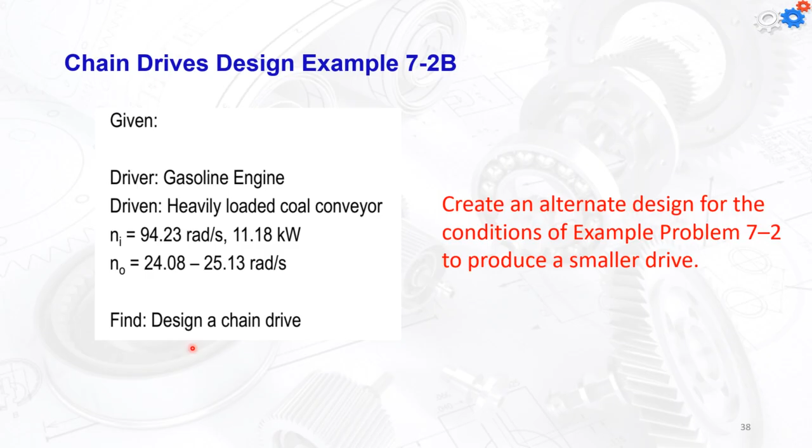Okay, so in example two, we're going to actually redesign the same chain system, but we're going to have a smaller drive. Okay, so it's exactly the same RPM, the same power, but we're going to use more than one strand. So we're going to do that simply by applying what we learned from the slide earlier. We're going to use a multi-strand design to permit the smaller pitch chain to be used to transmit the same design power of 21 horsepower and the same speed of 900 RPM.

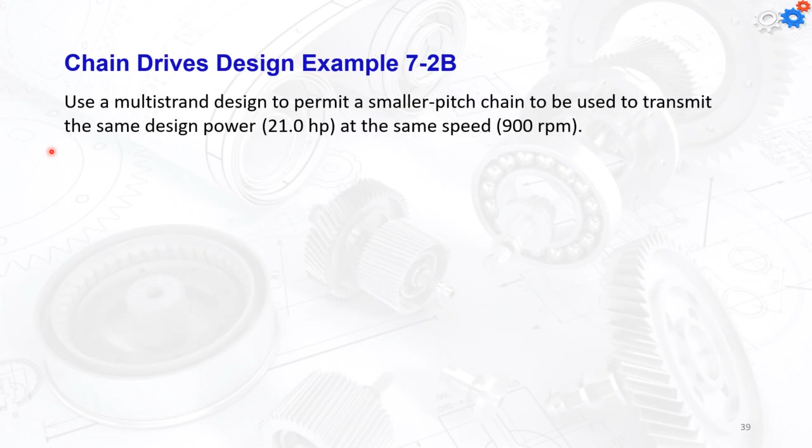So you remember from the above slide and also from the book, if you go to page 281 in chapter 7 of the textbook, you'll find that the ratings are for the single strand of the chain. Although multiple strands do increase the power capacity, they do not provide a direct multiple of the single strand capacity. So once again, the single strand is not half of the double, it's not one third of the triple, and it's not 1/4 of the quadruple. So we're going to have the strand factors to be 1.7, 2.5, and 3.3.

So in this scenario, we're going to choose four strands. So that means that our power here, 21 horsepower, is going to be divided by 3.3. So each strand out of the four is going to have power equal to 21 divided by 3.3, which is going to make it 6.36. Now, if I go back to the chain type number 60, you will find that these chains don't have the low range of power of 6.36 with the 900 RPM.

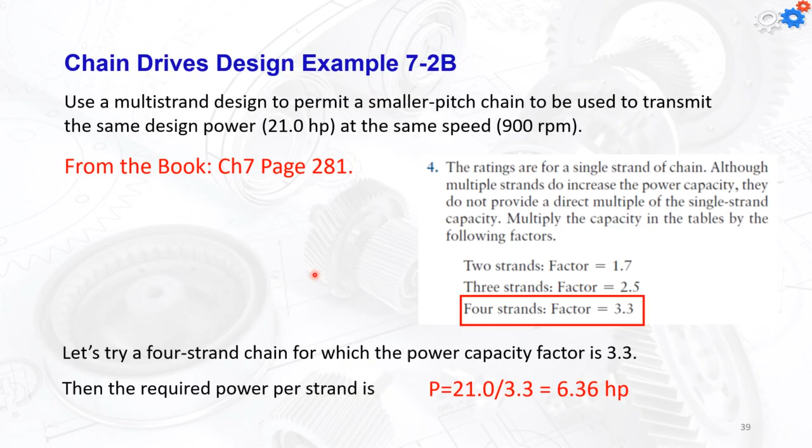So let's try a smaller chain. In that case, we're going to go to the type 40, table 7-14. The number 40 chain has a half inch pitch value and will be satisfactory. And we did that simply by finding the 900 here, the 6.57 horsepower, and this will tell me that the number of teeth is going to be between 16 or 17. We're going to choose 17, because the horsepower we have is 6.36, so the 6.18 cannot take it, but the 6.57 will take it. So we're going to choose 17 teeth for the smaller sprocket.

We said earlier, okay, whether we choose 17 or 18, it wasn't that different to get the diameter. Now you will see that it's going to be different, mainly because the pitch value has been dropped down by 30%. It was 0.75, now it's 0.5 inches. So if you would like to check it on your ruler, it's from 19 millimeters dropped down to 13 millimeters. So this will make a big difference depending on the length we are going to have.

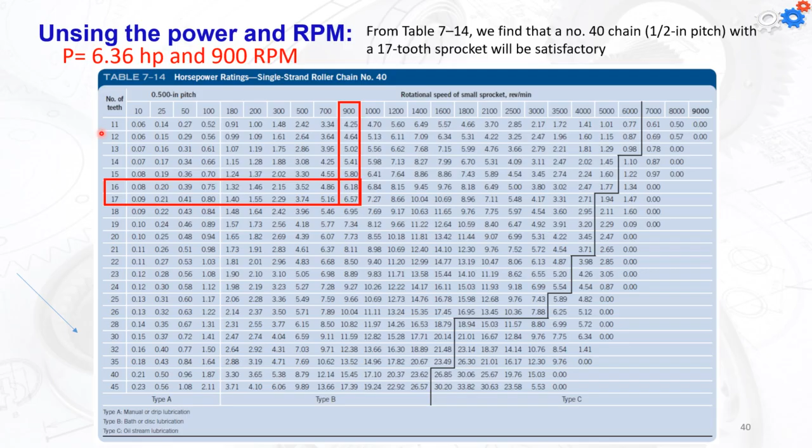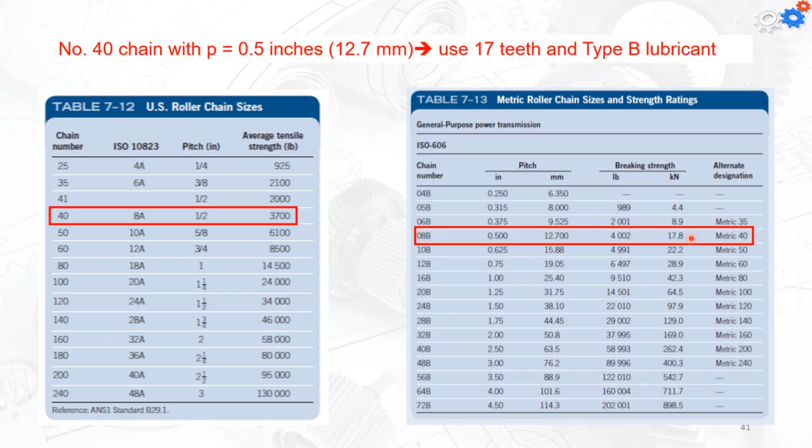Okay, so 17 is going to be used, and once again, we go back to the tables here. The 40 is going to have half inch pitch, 3,700 pounds for the strength, and for the metric case, we have the 08B, which is going to have 12.7 and 17.8 kilonewtons for the breaking strength. So number 40 chain is going to be used. We can now calculate the output number of teeth. The velocity ratio, remember, is the same, 3.83. We haven't changed the output RPM. So now we're going to multiply the 17 by 3.83, and the number of teeth is going to be 65.11. We're going to use 65 teeth.

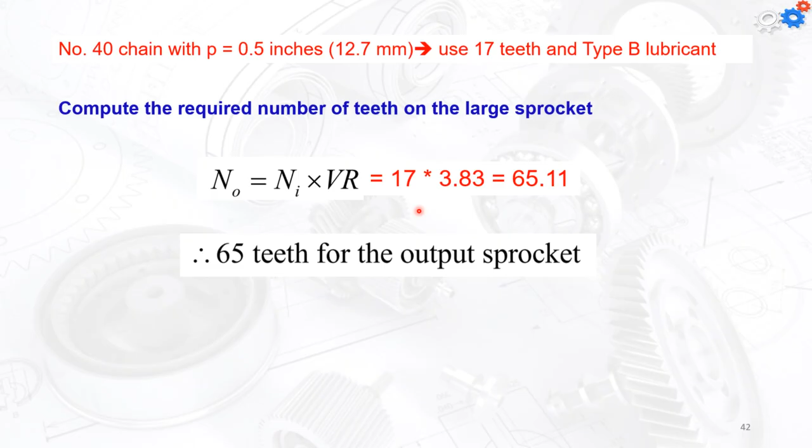Again, we're going to calculate the actual expected output speed. 17 and 65, so 65 divided by 17 is going to be the new VR ratio, and it's going to be 3.8235. So now we would like to check if the output RPM is going to be within the range of 24 something or not. So we just did that: 93.23 radians per second, multiplied by 17 divided by 65. It's going to be 24.38, so it's going to be okay. It's within the range, so we will accept this design.

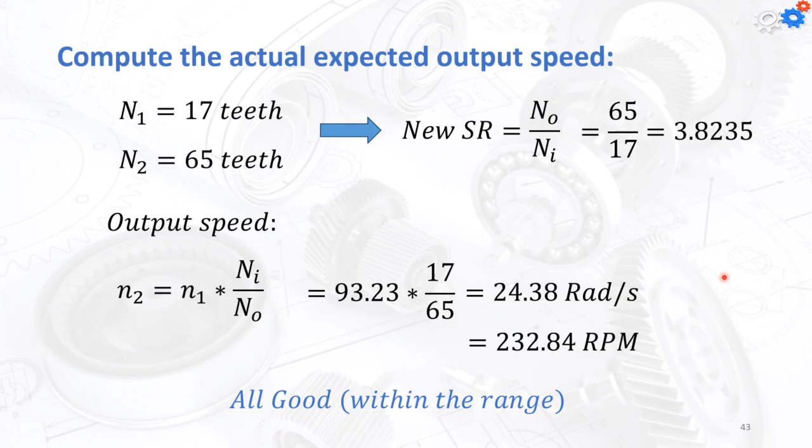Now we know the number of the teeth, and we know the pitch value is 12.7 millimeters, so we can calculate the new diameters. So the diameter 1 is 12.7 divided by the sine of 180 divided by 17. And for the diameter 2 is going to be 12.7 divided by the sine of 180 divided by 65.

Okay, so this will be the equation we're going to apply, and we're going to get that the first one is going to be 69.16. Remember, it was 109. So we almost have something like 45%, okay, within the range. Okay, sorry, 55%. And the same thing is going to be happening here. We're going to have 262. It was 400. So you can see that by changing the pitch value, the diameters will be changed a lot.

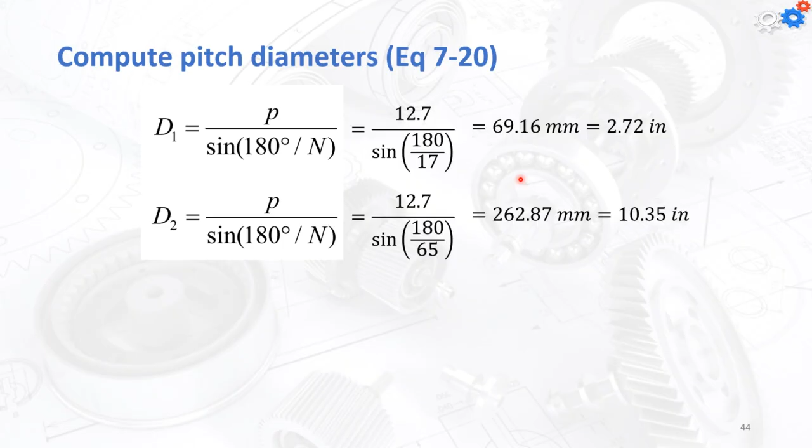So that's how we're going to do it. Just choose a different chain, divide the power by the factor of the strand, and you will get smaller sprockets. Now, we need to find the C value. Again, we're going to get something within the range. Let's choose 30 now. I'm going to use 30 because we can actually check 30, 35, it's up to you. If you're going to put that in an Excel sheet, everything will be done within seconds.

Now, we're going to calculate the L value for the chain by applying the equation 7-18. So the L value is going to be equal to, sorry, where's my equation? It's here. So we're going to get that the value of the pitch is going to be 102.9, which is equal to 51.45. I'm going to choose 103. Again, I'm changing that from the book, they choose 104. I use 103 pitches because I would like to have a shorter chain as well.

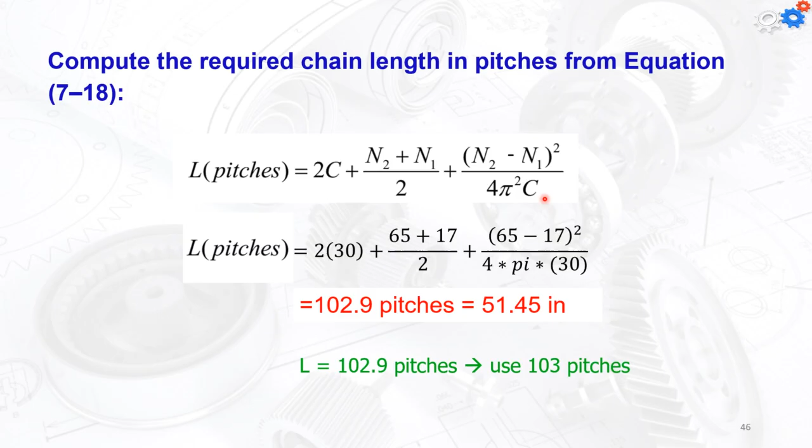So we're looking at the range of 51.5 inches as the length of the chain we're going to have. That's the open chain, of course. Now we're going to use the L value and the N values to calculate the actual C value. And we're going to come out with the value to be 30.028. So it's 30, the one that we're looking for. So the C distance is going to be equal to 15 inches or 381.36 millimeters. We used 30 pitches, and this guess was very good.

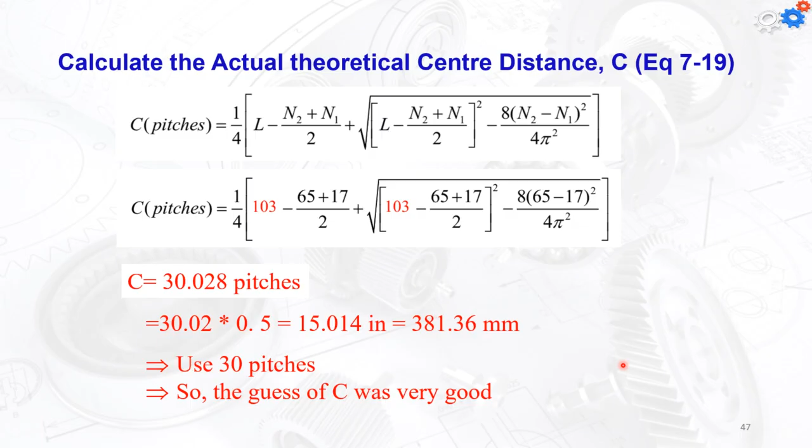Now that's it. We're only going to calculate the thetas with the new diameters, and you see that has been confirmed. The theta 1 should be more than 120. And we'll get 151, which is more than 120, so it should be okay. And continue with the second one, to have 208. Double check that theta 1 plus theta 2 should be equal to 360.

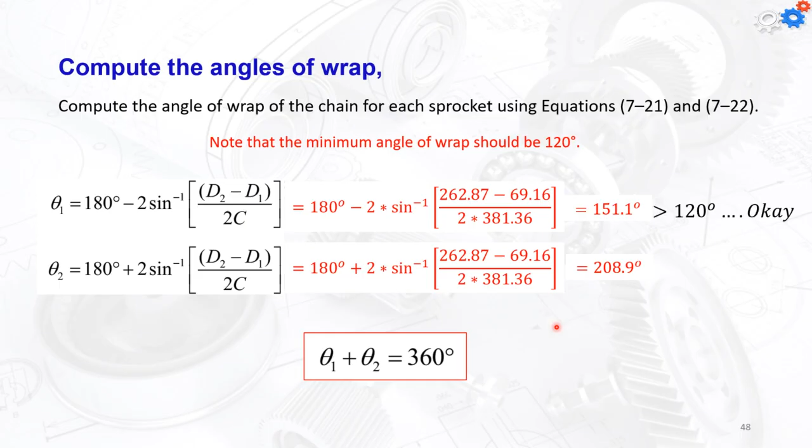And then my summary design is going to be the chain number 40, half inch pitch value. The four strand has been used. 103 pitches have been used for the length, 52 inches in total. And you can change that to millimeters, of course. The sprocket, the same thing, is going to be for the number 40 chain for the four strands, half inch pitch. And the small sprocket is going to have 17 teeth with 2.721 inches diameter. The large one is going to have 65 teeth

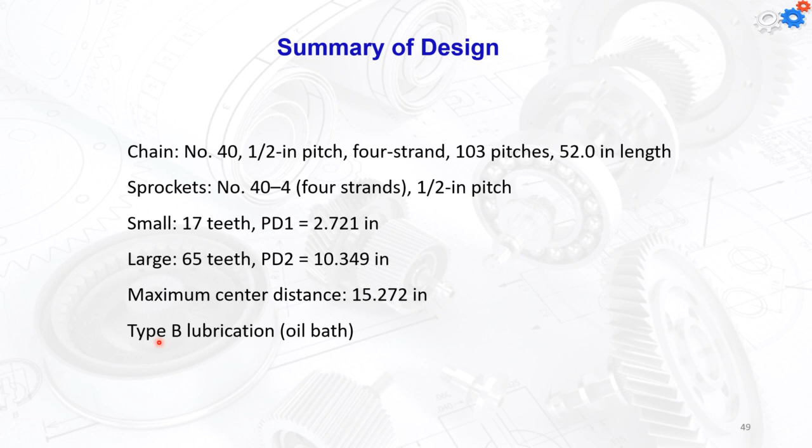with the diameter of 10.349 inches. The maximum center distance is 15.27. No, for us it's 15. And the type B lubrication oil bath is going to be used. So just remember, for us it's 15. We changed this value.

And thus, if I'm going to sketch the two systems next to each other, you can see actually that we have dropped the center to center distance from 726 to 387. It's almost half. And the same thing is happening with the diameters. Actually, you should have the degrees. Yeah, that's the same angles, and the length has been dropped.

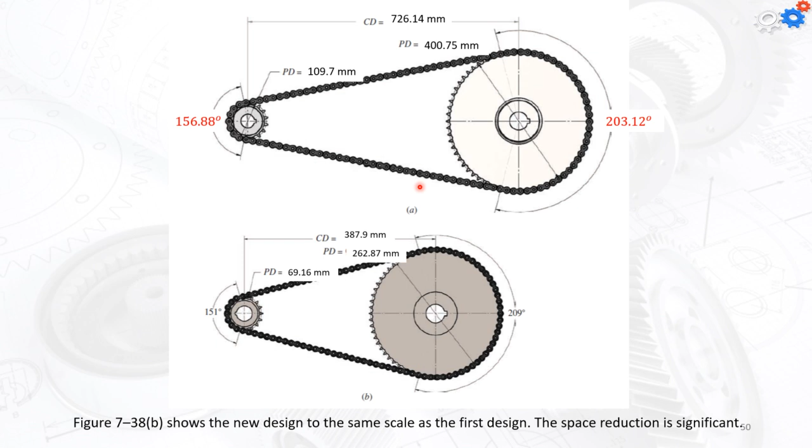So just imagine, from 109, we drop it down to 69. The 400, we drop it down to 262. The center to center distance from 726, we drop it down to 387. The contact area for the larger sprocket is longer, and it's going to be a little bit less for the smaller one. Okay, so that's the difference between the four strand and the single strand. Now we still have another two examples to be done in separate videos.